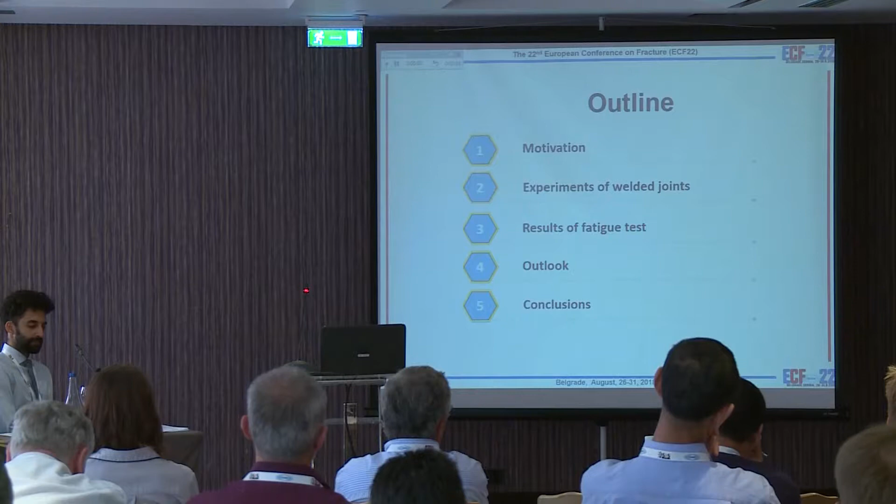Today I will present my work about the low cycle and high cycle fatigue assessment of mismatched load carrying cruciform welded joints. This work will be presented in the following 5 parts.

The first part is about the motivation for my work. Shipbuilding and marine structures are being built with high cycle, high strength steel, and even using ultra high strength steel in some crucial components. When the high strength steel is about 800 megapascal...

for the welded joint, the welded material doesn't meet the strength requirement sometimes. It can also cause problems such as hydrogen induced cracking, softening of the heat affected zone, or decline of toughness. So in order to give some solution for this disadvantage...

we can change the welding process to improve the weld quality, such as lowering the energy of the welding process, doing preheating or post-heating treatment, or HFMI. Another way is to change the material to decrease the welded strength and increase ductility. So for this welded joint, it may result in a mismatched welded joint for the high strength steel.

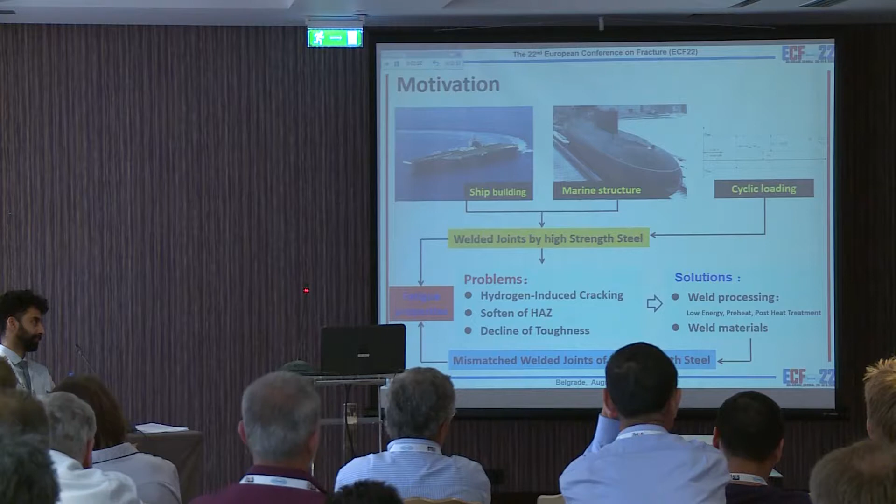So my project is to study the fatigue property of the mismatched welded joint. The study aims to investigate typical welded joints used in shipbuilding structures, such as butted joints, non-load carrying welded joints, and load carrying cruciform welded joints. The aim is to investigate the fatigue property difference between the base metal and welded metal, and the low cycle fatigue life of the mismatched welded joint.

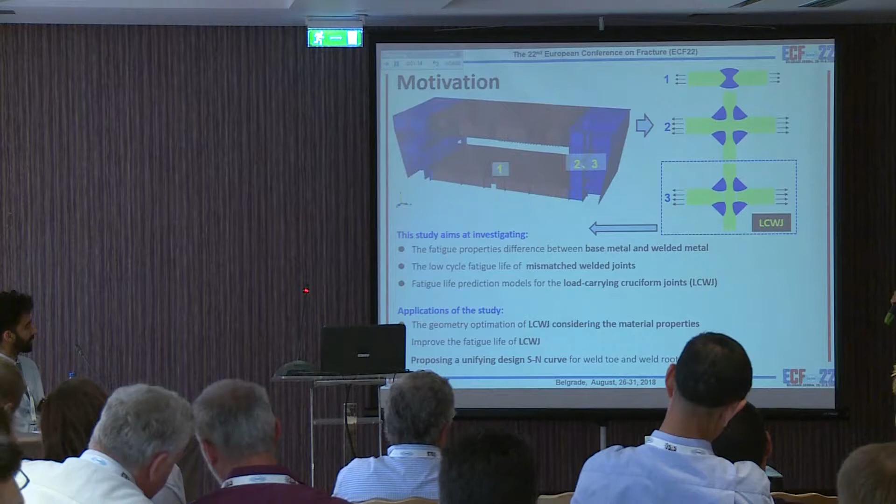I also want to give fatigue life prediction models for load carrying cruciform welded joints. In the future, this work can be used for geometry optimization of the LCWJ, considering material property, to improve the fatigue life of the welded joint.

This is the experiment for the material we studied. In order to get the property of the steel, we welded a butted joint, cut the specimen from the plate, and did basic mechanical tests. We can see the undermatched welded stress-strain curves, and the blue and white curves are the base metal and the even matched welded joint.

We assume the base metal and even matched welded material have the same property for the joint. This is the property under cyclic loading - we can see the strain and stress curves. This is monotonic loading, and this is cyclic loading, which shows some softening phenomenon between these materials.

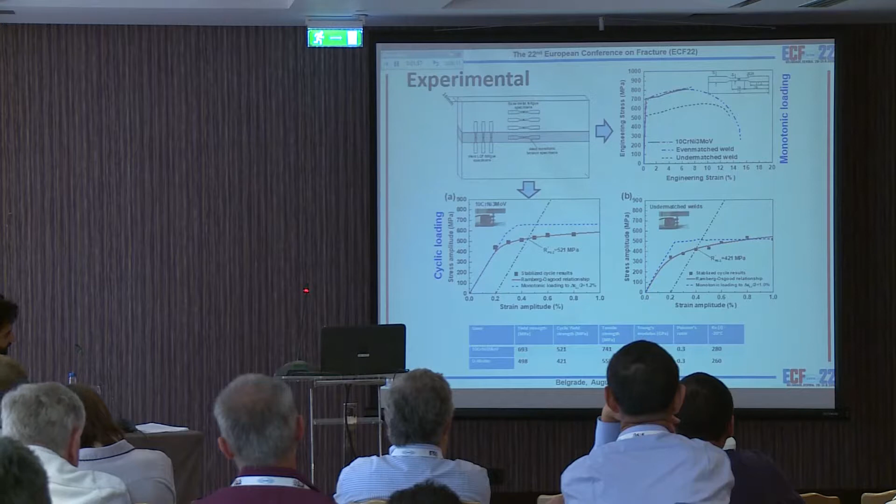Next, I welded some cruciform welded joints, using wire electrical discharge cutting to cut the specimens, and then used these specimens for low cycle fatigue testing and high cycle fatigue testing.

It should be noted that for the high cycle fatigue test, I used force controlled conditions, while for the low cycle fatigue test, we used an extensometer to control displacement - these belong to different loading conditions. For the fatigue test parameters, we used a stress and strain ratio of about 0.1.

The fatigue frequency for low cycle fatigue is low, 0.5 to 2 Hz, and for high cycle fatigue it's 5 to 15 Hz. The final failure criterion is about 30% load drop for low cycle fatigue, and complete breakage for high cycle fatigue.

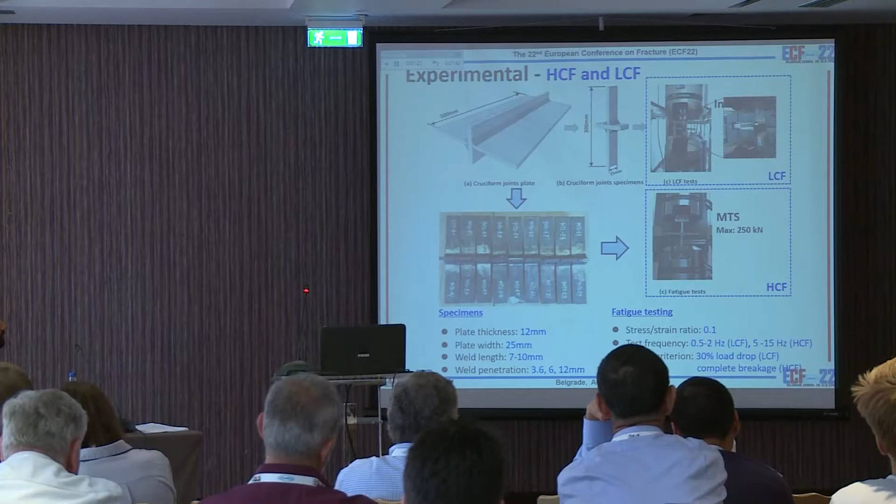This is the result of the failure location. We designed the geometry using electronic cutting processing between the welded toe locations.

We can see even it has the short crack in the welded joint, it occurs the crack from the welded toe, and then when the crack increases, it's a failure from the welded root.

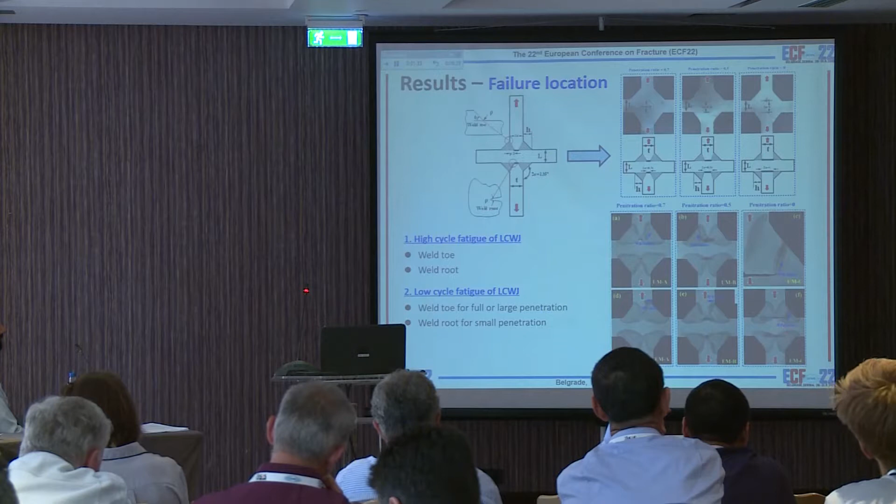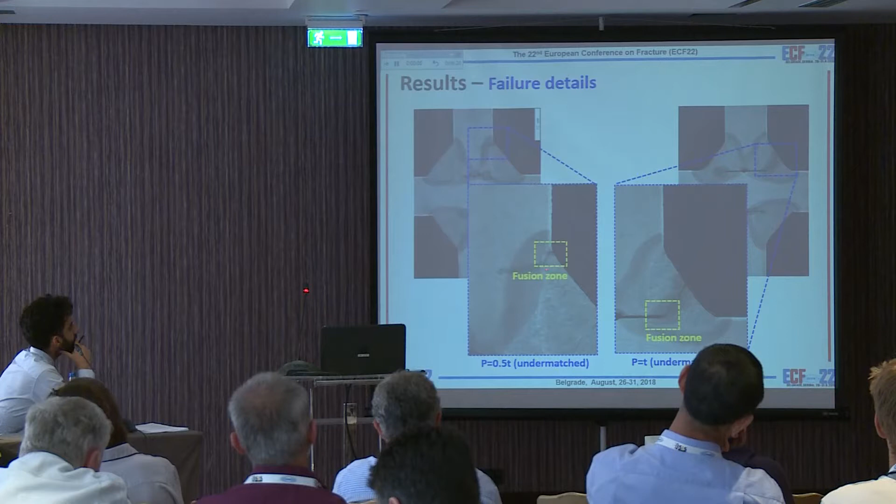For the welded toe, we can see it from the fusion zone, and for the welded root, failure is also from the fusion zone.

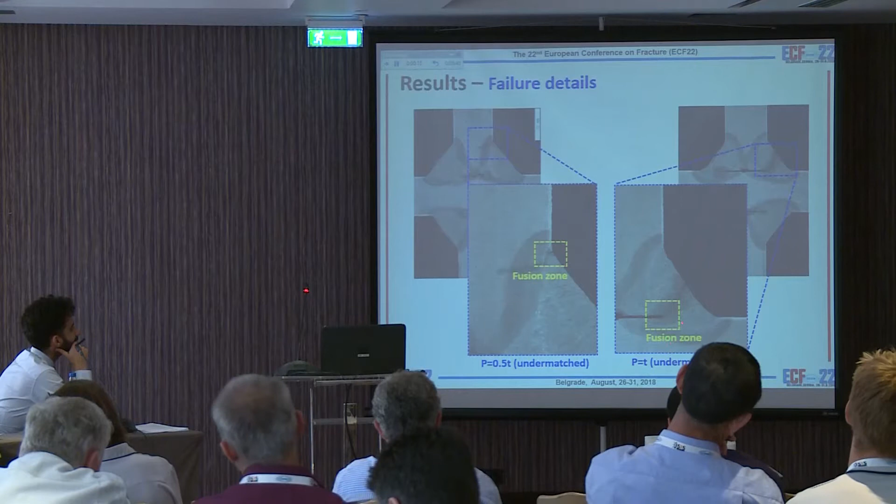And then we summarize the fatigue data. We can see for the welded toe failure, we could not differentiate between this data for the undermatched or even matched welded joint.

And then if we can see, this data is about the welded root failure. It is lower than the welded toe failure life.

So we're using the IIW standard to compare to this data. We can find the FAT 63 is suitable for the high cycle fatigue of the welded toe failure case.

And then FAT 36 is suitable for the welded root failure. Then the material mismatch effect on the high cycle fatigue can be neglected. So the fatigue life is greatly affected by the failure location.

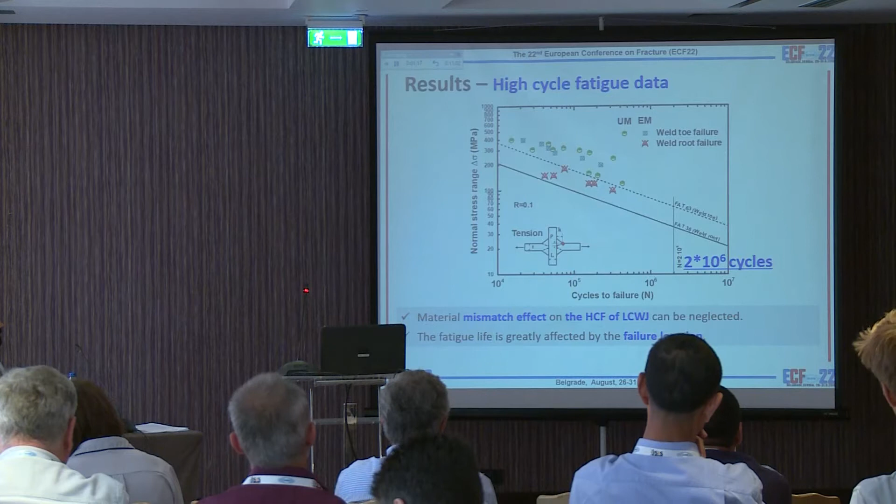So this result is about the low cycle fatigue data, and we fit using the linear relationship, about the welded toe failure and the welded root failure, and finally we compared the results between the welded toe failure and the welded root failure.

We find that the welded root failure is lower than the welded toe failure. But we can see this picture for the welded root failure.

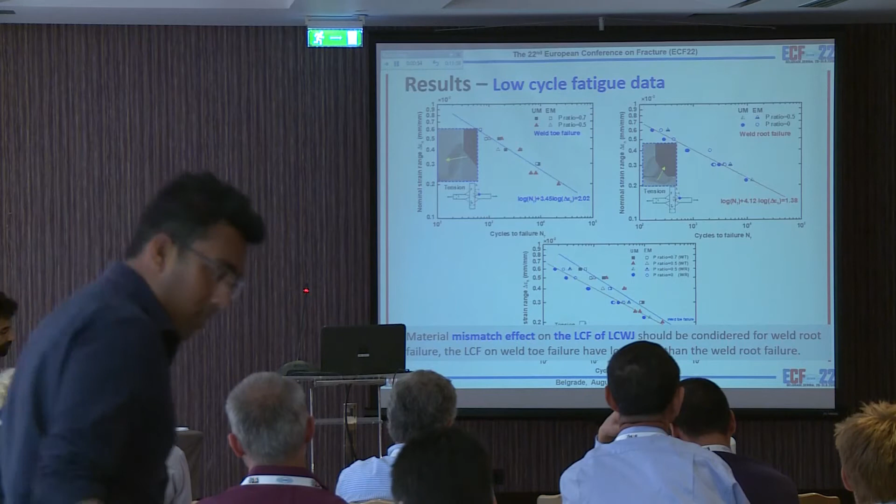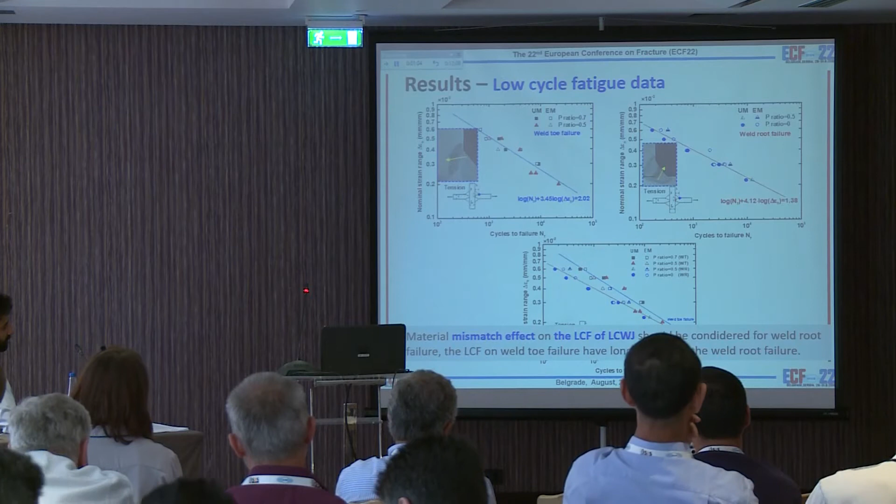The mismatch shows some effect between the undermatched welded joint and the even matched welded joint. So we can find the mismatch effect on the low cycle fatigue of LCWJ should be considered for welded root failure, and the LCF on welded toe failure has a longer life than the welded root failure.

So we put it together in the same diagram, and we can also find this for the low cycle fatigue. We could not find some standard in the IIW standard.

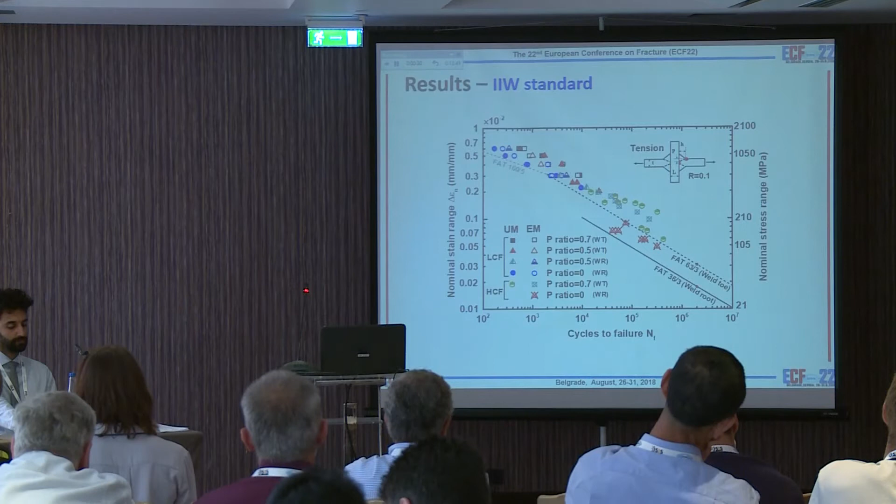And then additionally, I used the effective notch strain method to evaluate this data in the diagram, and this analytical solution is from a Japanese researcher, and he gives some solution for the welded root prediction.

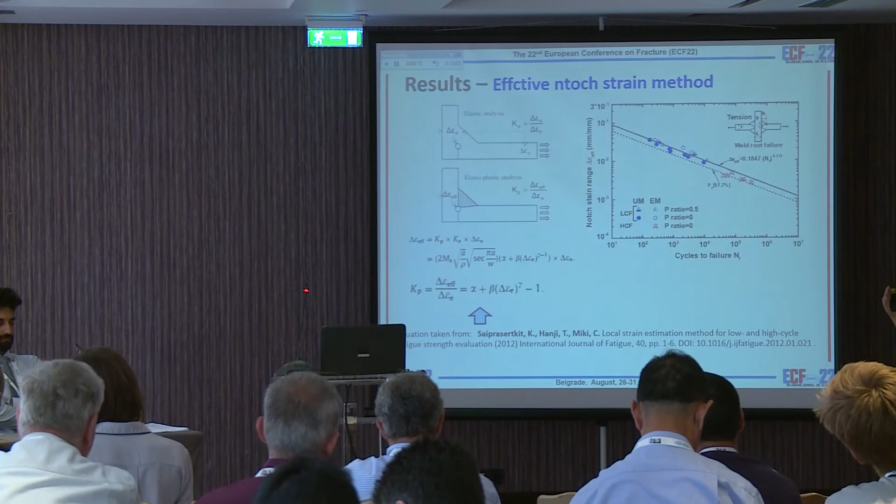He also used this analytical solution to predict the welded toe failure as an engineering estimation. But for the low cycle, for this load carrying cruciform joint, we could not find a solution to estimate the value between the welded root and the welded toe.

So the next step, I want to use the Manson-Coffin curve between the base metal and undermatched metal to predict the welded toe and welded root characterized parameter.

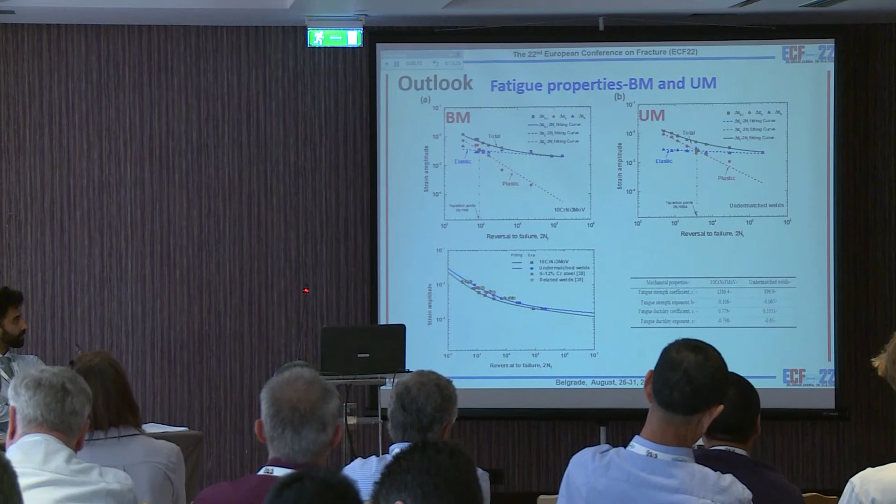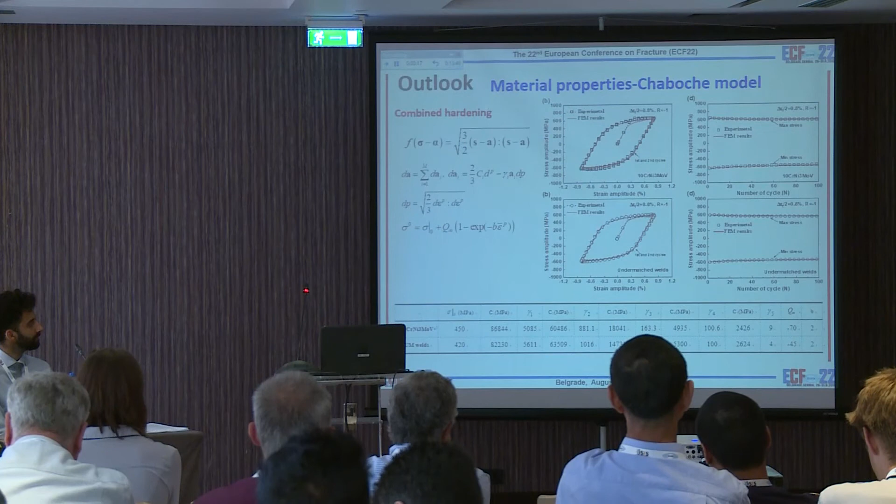We also used the Chaboche model to simulate the welded toe or welded root parameter under the elastic and plastic range. And then we're using the energy method to analyze the characterized parameter of welded toe and welded root and compare the different models, and finally we get the transition zone.

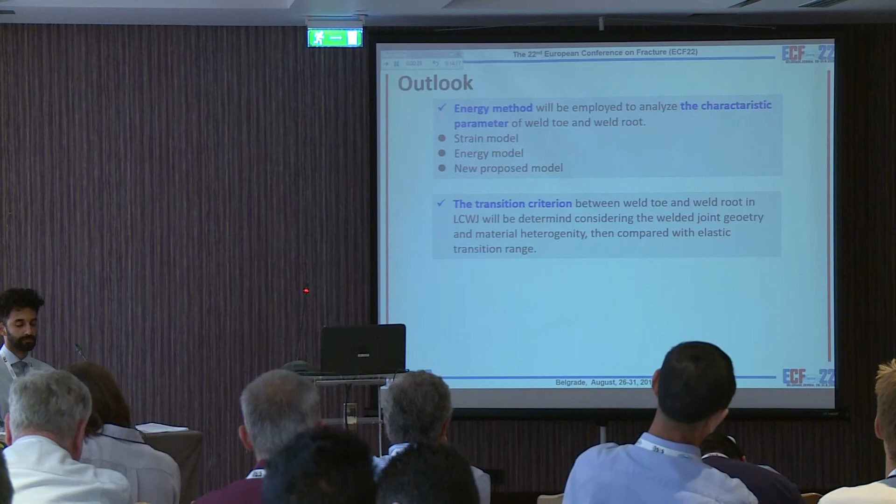Between the welded root and the welded toe. And finally, we will compare it with the elastic transition range.

So this is my conclusion. I should note that the material mismatch effect on the high cycle fatigue of the load carrying cruciform can be neglected. And for the fatigue design purpose, it can be modeled as a homogeneous model.

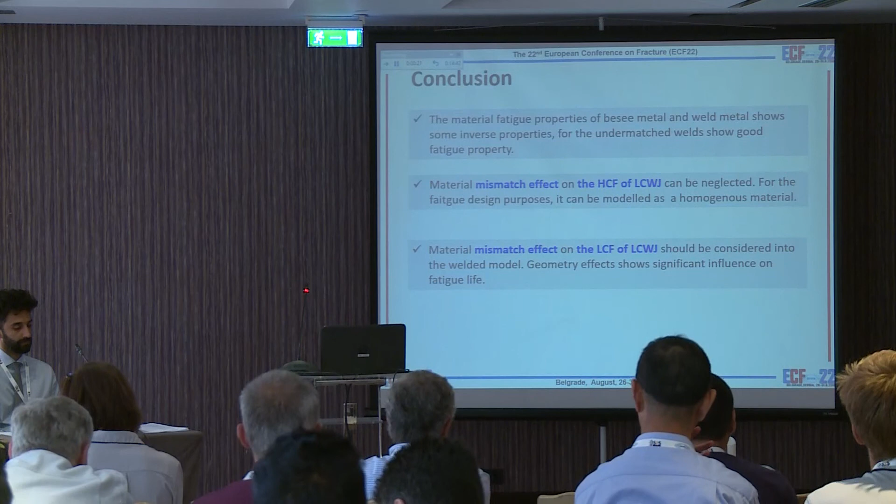And for the low cycle fatigue, the mismatch effect is not so significant. It has some effect on the fatigue life, but I think geometry is the most important reason for the fatigue life prediction. So okay, thank you.